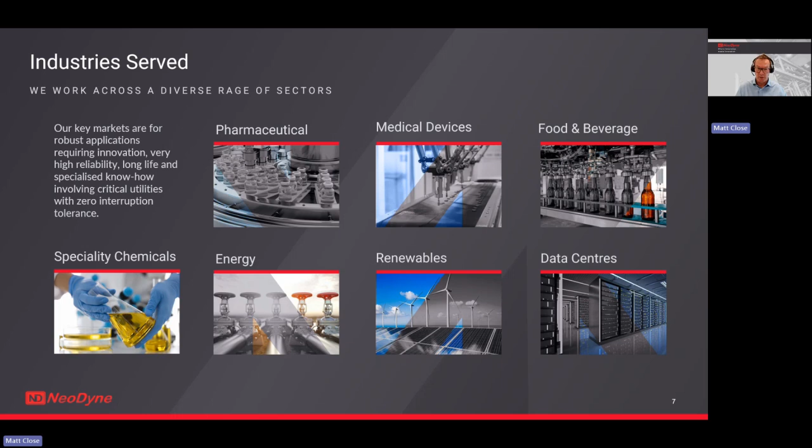So focusing more on specialty chemicals, that's more in the digital manufacturing space.

Okay, so that probably covers a brief overview of NeoDyne. If you're interested in anything we've got to offer, not necessarily in MES or MOM, then do get in touch. I can certainly put you in contact with the right people.

Let's move on to some industry trends in specialty chemicals, and maybe some challenges that the industry faces. So, critical industry trends here.

Navigating market volatility: a 50% energy increase in prices, which has been reflected for a number of reasons over the past few years, but is expected to continue. On top of that, companies are trying to execute on net zero, so there's a 45% reduction in emissions required to meet the 2050 goal, and general energy usage across the globe is increasing, so the demand for energy consumption is going up and up.

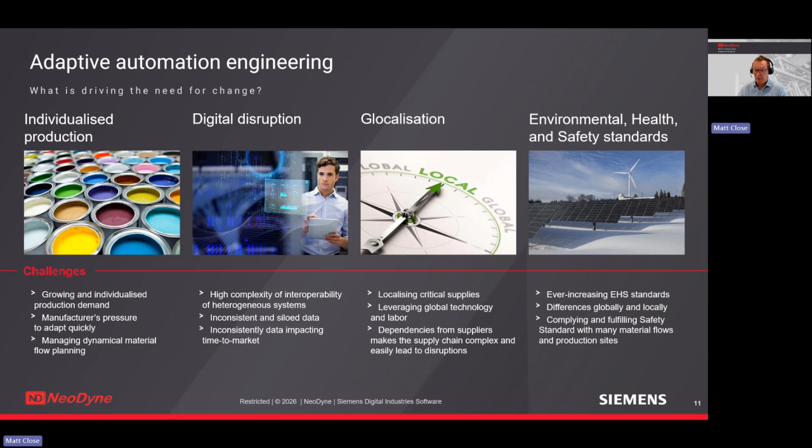And finally, EHS standards. They're ever increasing, and they're different around the world, but companies that aren't in one location have an obligation to meet all of those, and it reflects heavily on the company. Different material flows and production sites have different requirements, but ultimately companies want to meet all of those.

Briefly, this slide highlights the fact that the sector is growing. It's also a significant sector within the UK, certainly the third largest there, and it continues to look like that market will grow significantly over the coming period.

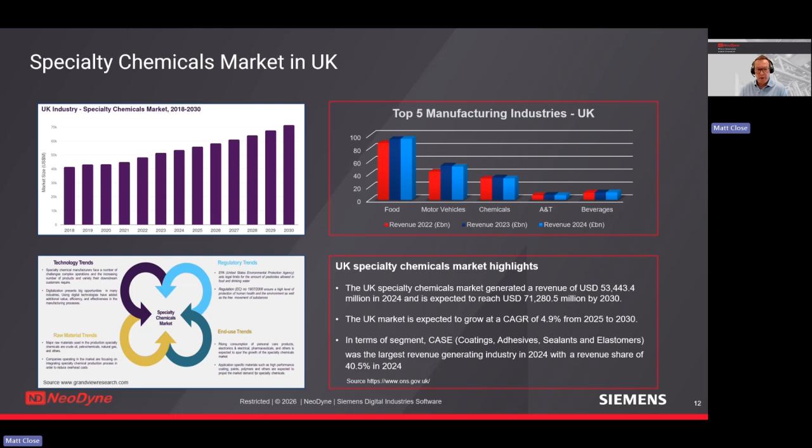Technology trends, raw material trends, and regulatory trends are all having an impact, and that also affects the end use trends as well.

Okay, so that highlights some of the challenges that the industry faces. What I'll do is hand over to Ash, who is our lead MES engineer in the UK, and he'll walk you through some of the advantages that Opcenter can bring and how that can address the challenges you may face. Thanks, Ash. Thanks for that, Matt.

So Matt's just gone through talking about the pressures specialty chemical manufacturers face, which include a bunch of factors such as cost, compliance, complexity, and sustainability. But the real challenge is that most plants are still trying to manage execution using a mix of ERP screens, emails, spreadsheets, and disconnected systems. This is where manufacturing operations management comes in, and Siemens Opcenter is Siemens' enterprise platform purpose-built for complex industries such as chemicals.

So when we walk into chemical plants, the same problems come up again and again. ERP plans production, but the shop floor lives in reality. Operators rely on paper, spreadsheets, and tribal knowledge. Materials get misused, changeovers take longer than expected, quality issues appear too late, and management only sees performance after the fact.

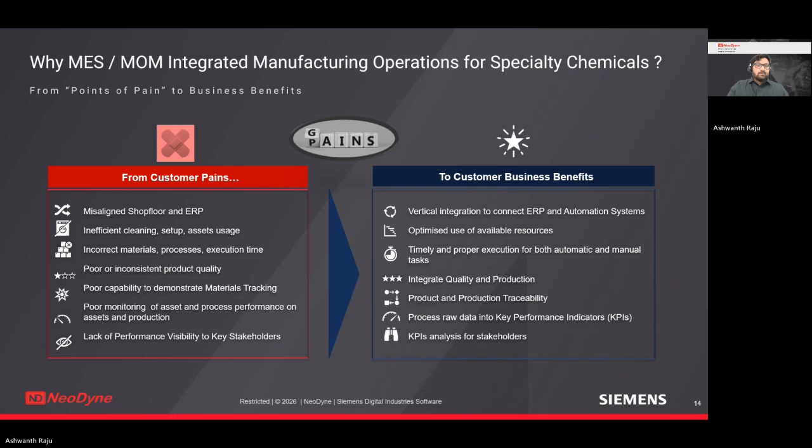So I guess we can think of digital manufacturing as three layers. ERP is great at planning and transactions. PLM handles product and process design, but neither of them actually runs production. MOM sits in the center and orchestrates execution on the shop floor. It schedules work orders, enforces resources, captures quality, tracks the materials, and connects automation systems back to the business systems.

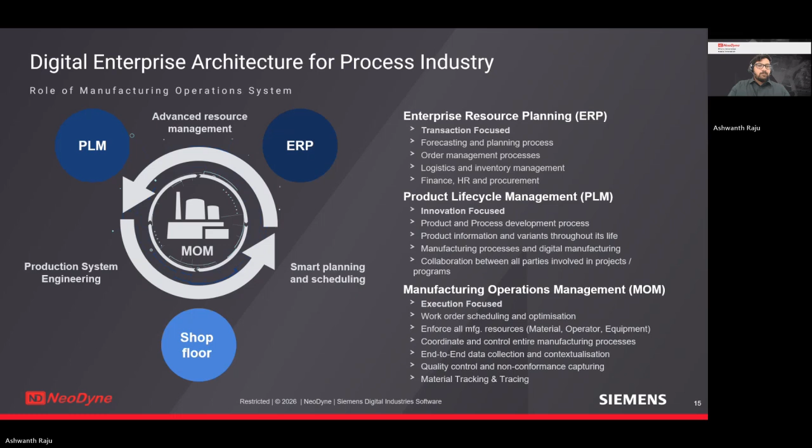So this is a brief overview of different systems used to manage manufacturing operations in the current landscape. MES isn't a novel concept. It has been around for years, but many projects failed or became overly complex. Some of the reasons could be heavy customization, long deployment periods, poor user adoption, lack of management buy-in, just to state a few.

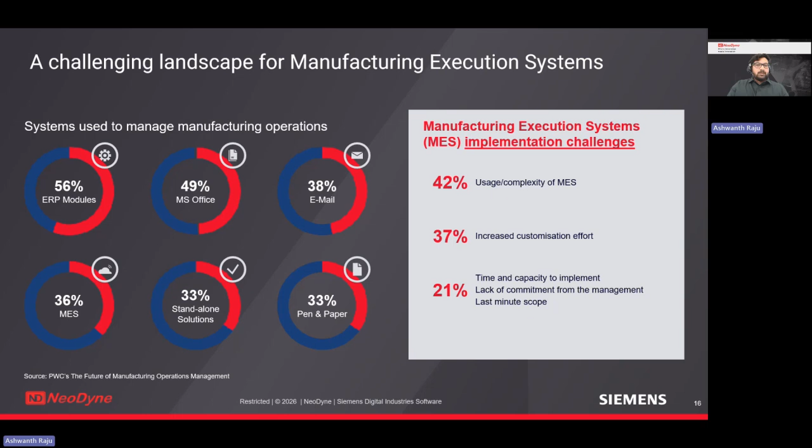That's exactly why Siemens built Opcenter as a modular, low-code, scalable platform to reduce complexity and accelerate time to value.

We'll be going through the portfolio overview which Siemens Opcenter provides. So Opcenter isn't a single MES module, it's a full manufacturing operations portfolio. Modular applications, industry templates, for process manufacturing in particular, native integration, cloud ready, and designed to scale from one plant to global operations.

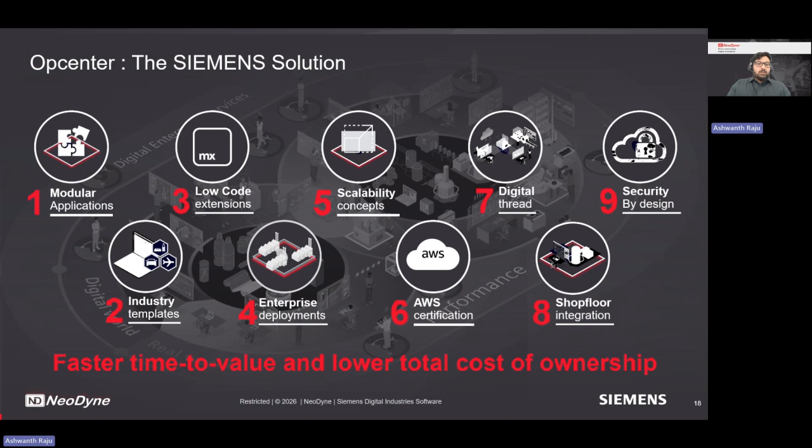This portfolio is built as modular but fully connected digital manufacturing as the backbone. MES sits at the core, executing and controlling production, while the other modules support areas like logistics, planning, quality, analytics, and so on. When everything works together, you get a real-time, closed-loop manufacturing operation fully aligned with ERP and automation systems.

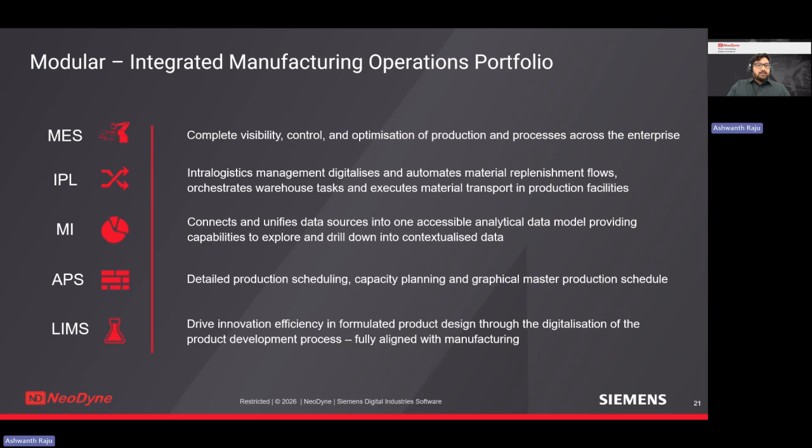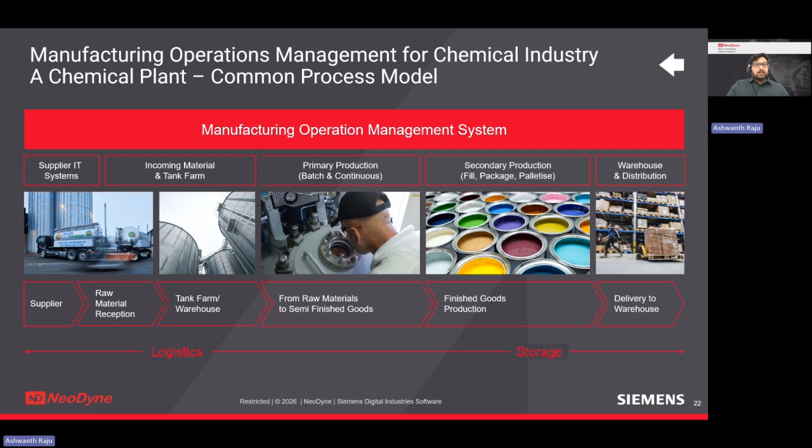So this is a typical specialty chemical operation, from raw material reception to tank farms, batch and continuous production, packaging, and warehouse distribution. Opcenter sits across this entire value chain, not just production, but logistics, quality, and material flow. So instead of islands of automation, you get one orchestrated digital manufacturing layer.

So these are the main pillars of what the Opcenter solution portfolio delivers. There are 6 pillars, and we'll go through each of them in detail. But the vertical integration is a common theme across the different components. It synchronizes ERP and manufacturing.

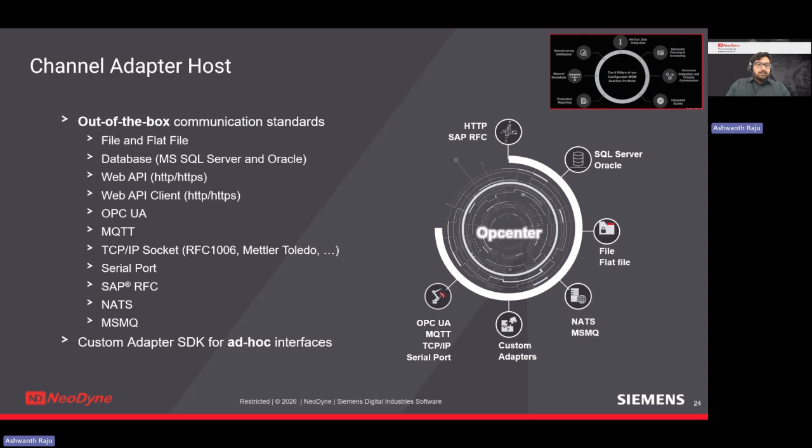So again, these are some of the communication standards which Siemens provides out of the box. A few of you can recognize some of these file formats, but again, it depends on the business and the need. The drivers exist, which can cater for easy integration.

So the first component I'm going to talk about is the APS, Advanced Planning and Scheduling. Production plans are defined at the business level, and the way it's distributed to the shop floor is via this component. Scheduling is a part of vertical integration because when we download production orders from ERP to MES, these are sequenced and assigned to the right equipment to increase the efficiency of resource utilization.

The vertical integration also works the way back from the process into the ERP to deliver exact shop floor data about, for example, material quantities, so that ERP has reliable feedback on how actual orders have been carried out.

This is just to give you a look and feel of the Opcenter APS module. Again, a bunch of simulations can be done, and plans can be made, which can be reflected back into MES via the integration methods I already touched upon.

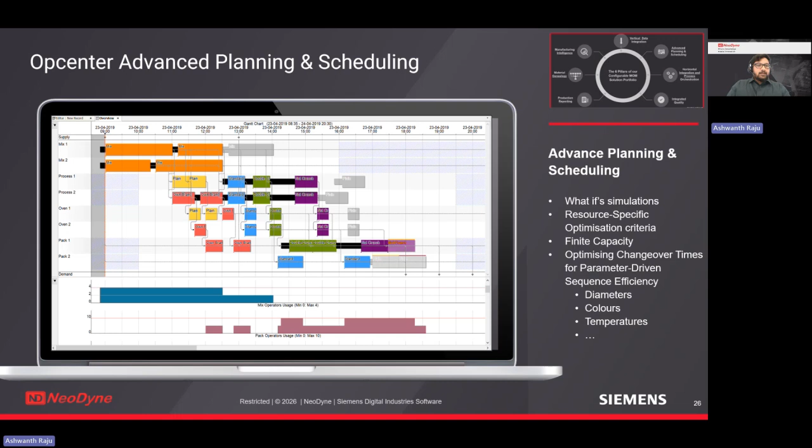So the next component is the horizontal integration and process orchestration module, which synchronizes systems, automation, and operator tasks throughout the different areas and processes to reduce errors and cost of manufacturing.

So these are a bunch of slides to show you the out-of-the-box UIs, and the operator goes into specific screens based on the operation or functionality he's trying to perform at that point in time.

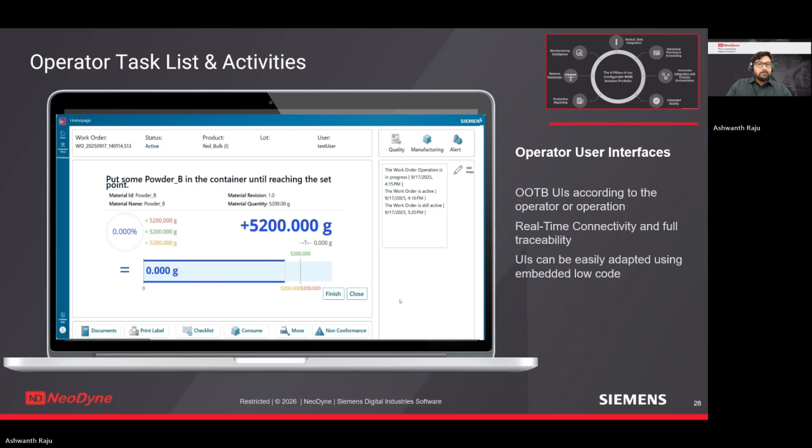The next component I'd like to talk about is integrated quality, which is an important cog in the whole MES landscape. Execution goes hand in hand with quality. Siemens enables at-line and offline quality execution so that the right quality tests are performed at the proper point in time and results are always associated to the tested materials.

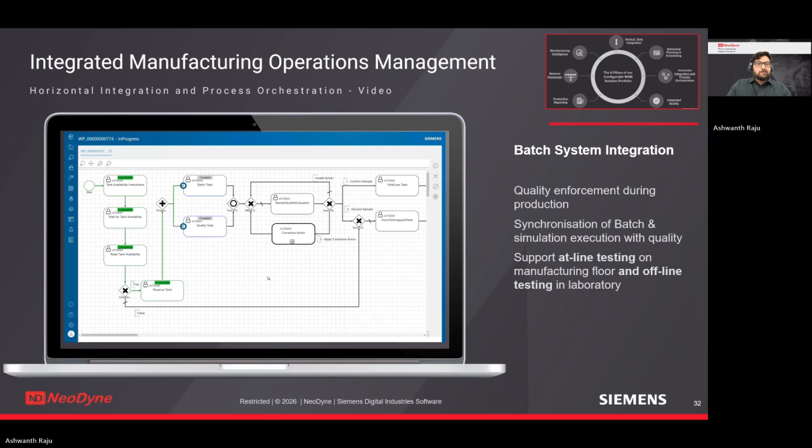So the next component is the production reporting, which allows detailed visibility on production performance based on data collected in real time from all the production processes.

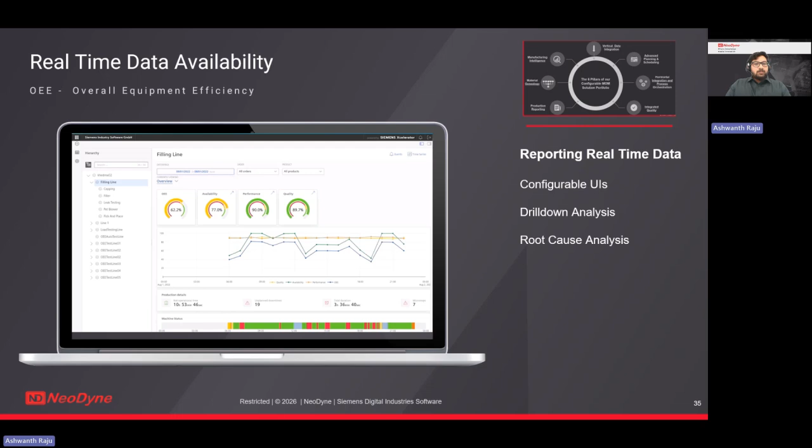This is OEE, and we have a bunch of inherent reporting tools with configurable UIs which can be used to drill down, analyze, and get to the bottom of what the actual issue is. It's also platform independent, so data coming from all different sources can be utilized via these reporting tools.

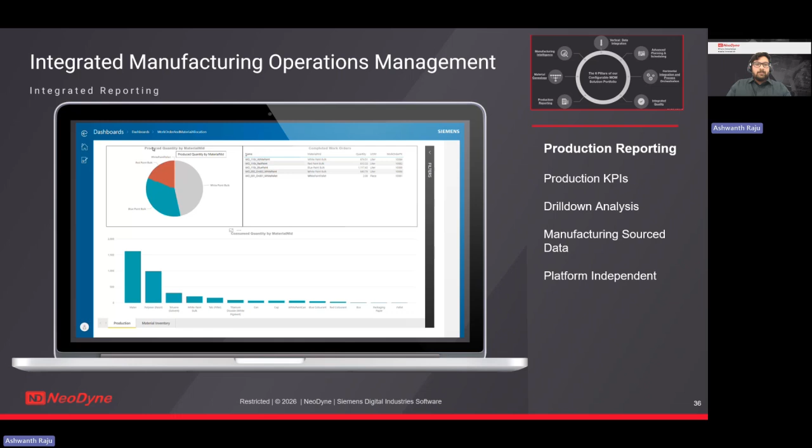The next bit is the material genealogy, which in essence is forward and backward traceability. This enables a manufacturer to efficiently perform a product recall if necessary due to customer complaints, and also to track and show the quality of the produced finished good.

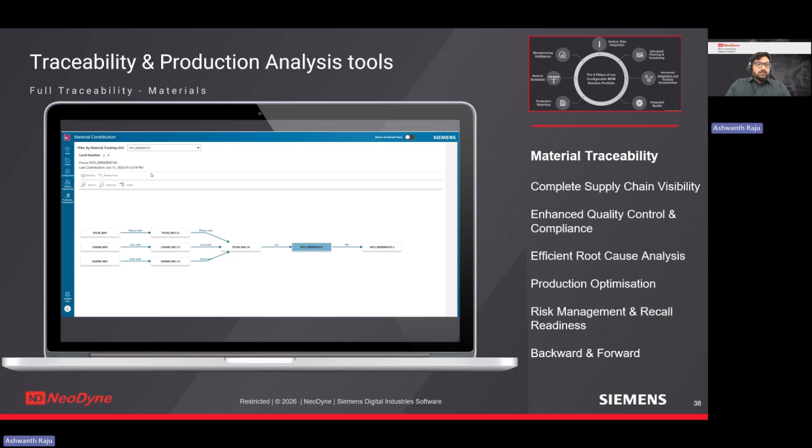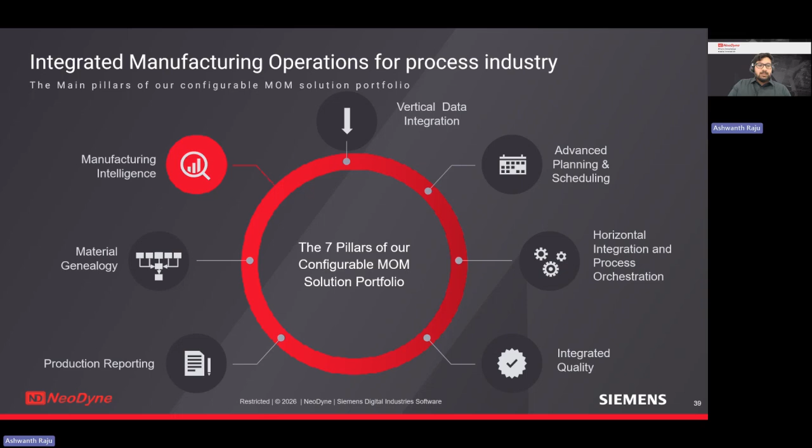The last bit is manufacturing intelligence, which gives you full visibility on the process, aggregates data from all these different sources, and transforms them into KPIs that people actually care about. Manufacturing intelligence can be applied to one single site, but can also be scaled to several sites. Such visibility usually allows you to detect the root cause of issues and supports continuous improvement of manufacturing.

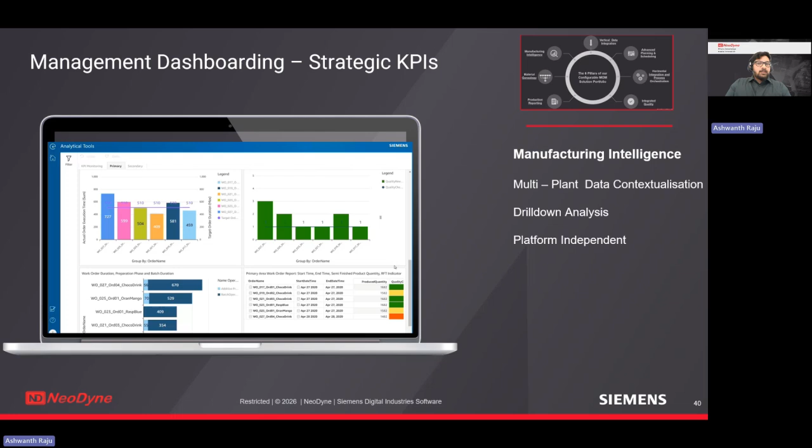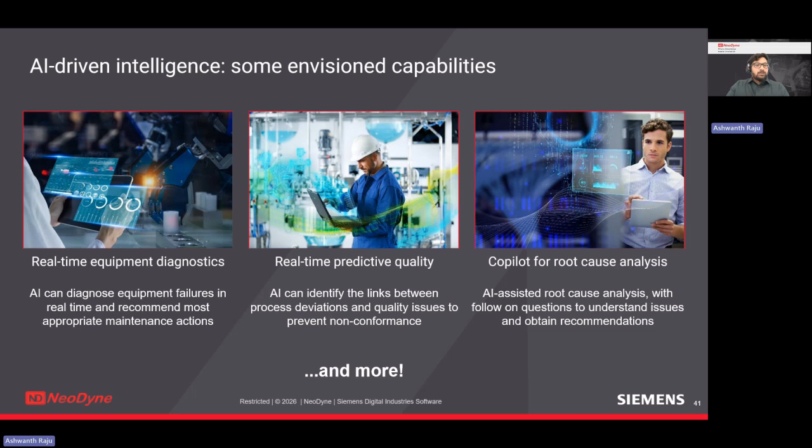On top of this digital foundation, Siemens is layering AI for predictive quality, automated root cause analysis, and smart engineering assistance. The key point is you can't do AI without clean, contextualized manufacturing data, and that's exactly what MOM provides.

Just to finish it off, some highlights: when manufacturers implement a solution such as Opcenter, the results are very practical - higher efficiency, better quality, regulatory compliance, and so on. This isn't just about IT transformation, it's about continuous operational excellence.

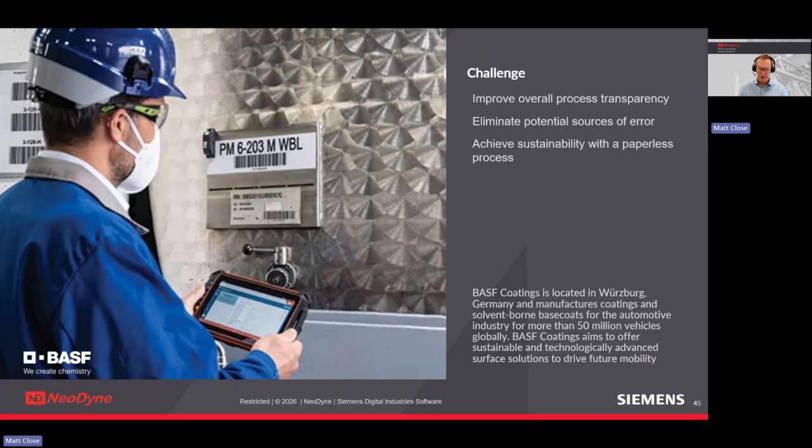Just before we close, as I mentioned, we're working on a current live project in the UK in this sector, but unfortunately it's not one we're able to discuss. What we can highlight is a couple of success stories from Siemens themselves. The first couple are with BASF and cover some slightly different challenges. In the first one, there was a lack of overall process transparency and potential sources of error due to paper processes, and the errors that can bring into the system. This was BASF in Germany, with obviously significant industry.

They implemented a modern MES on Opcenter to collect and handle the data automatically and digitally, which meant eliminating print orders and achieving a paperless process. It was implemented using PCS 7, which really did reduce project risks and was successful in increasing and improving process transparency.

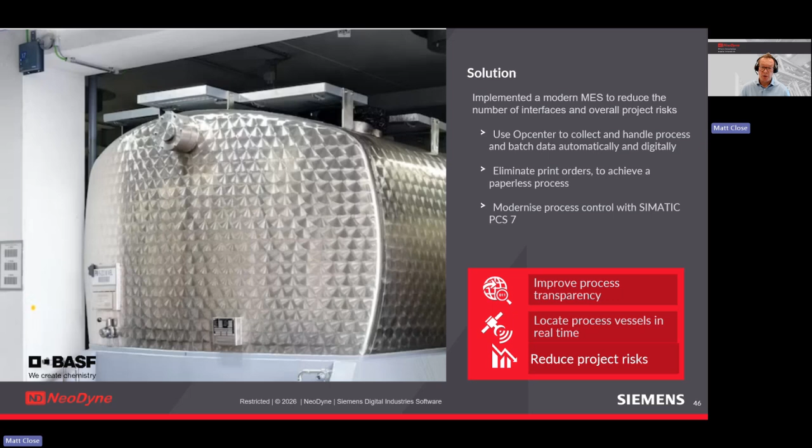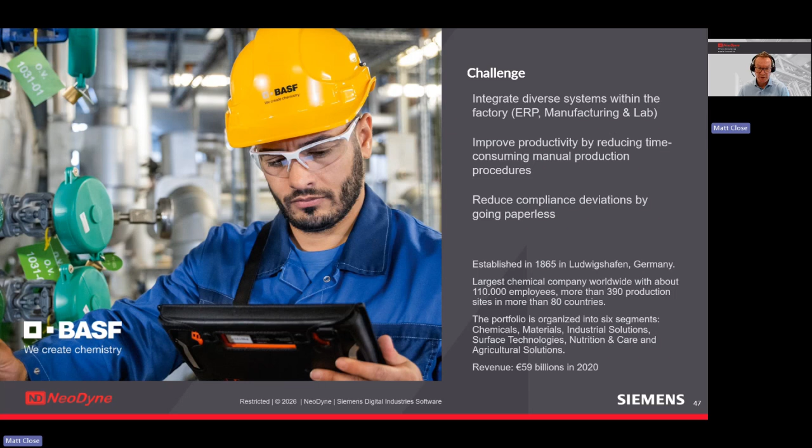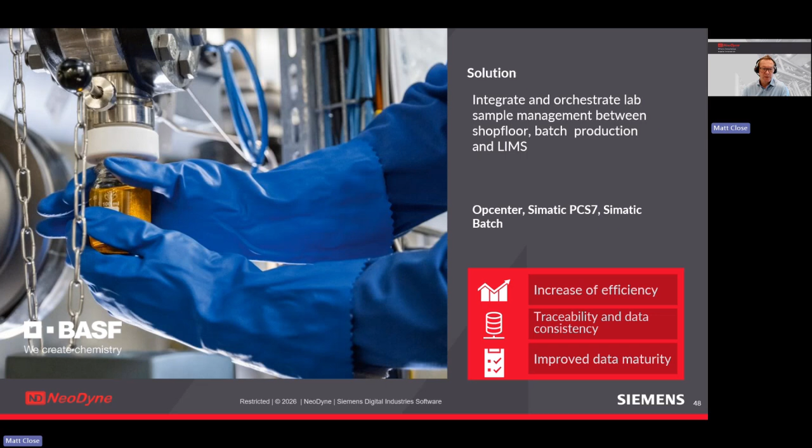A similar challenge with BASF was more around LIMS - the lab and manufacturing and quality side - with a very time-consuming manual production procedure that caused compliance issues with regards to deviations. Again trying to go paperless, for a significant revenue, 59 billion company. The solution was integrated batch, shop floor and LIMS, all implemented via Opcenter and PCS 7, but with SIMATIC batch as well. That increased the overall efficiency and data maturity, which reduced issues with regards to the LIMS and quality.

Finally, a smaller company, still in specialty chemicals, in the paint industry - Koba in Central and Eastern Europe. They had significant issues with regards to non-conformities and improving customer satisfaction. They noticed a 70% decrease in product non-conformity reports, which is a significant saving, and hugely improved their customer experience and satisfaction.